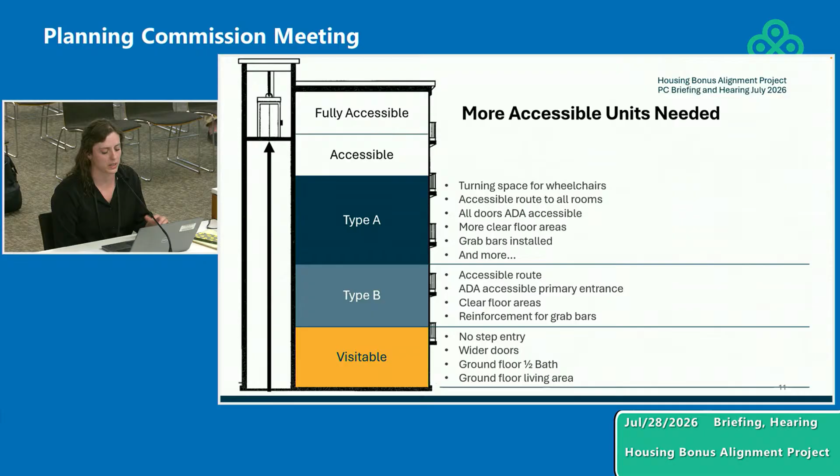We were fortunate enough to tour the new M. Carter Commons before they opened. It's a senior housing development funded in part by the city, a partnership between Urban League and Northwest Housing Alternatives. It's an example of what even higher levels of accessibility might look like inside a home, including low storage spaces, removable cupboards, roll-under sinks, front controls on appliances, and easy access to grab bars and seats in bathrooms.

More accessible units like these mean more people will have better and adequate access to the essential functions in their home. And if I might say, it's not a bad looking unit—it's a Type A unit, so a slightly more accessible level.

All right, so I'll jump into how this project will likely help meet those needs. The scope of the project is pretty limited to the multi-dwelling residential and commercial mixed-use zones, where most of our existing zoning bonuses are already applicable, and where we're already able to build the most densely. So you might see these along Woodstock, 122nd, Division, Interstate—our centers and corridors.

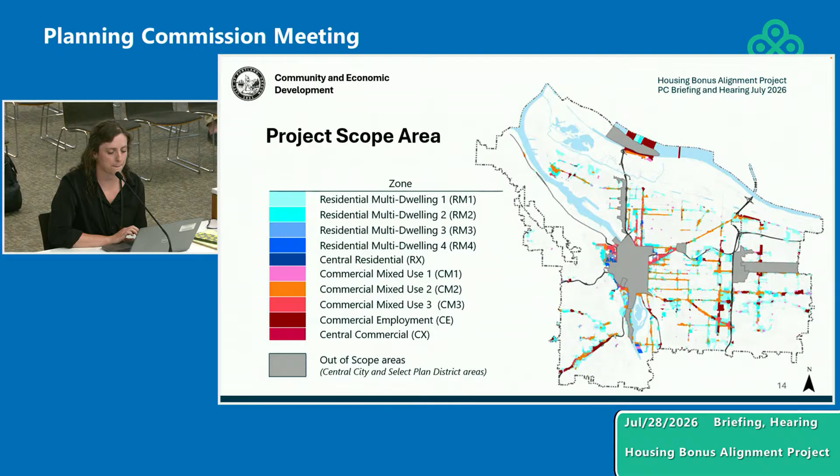I made sure I printed this out for you all too. I know it's really hard to see, but the multi-dwelling and commercial zones—so RM and CM zones—I wanted you to see the scale of buildings that are possible in these zones around our centers and corridors and near our single-dwelling residential areas. The types of new development in these zones can really range from duplexes to small apartment buildings to a more diverse range of higher density structures, and buildings in these zones might range from 2 to 7 stories or higher.

And then before we get too far in, what is a bonus? Hopefully the screen will change for you all soon. There we go. Okay, sorry about that.

So the scope of this project is exclusively zoning incentives—the additional development that's allowed in exchange for certain public benefits, not direct financial incentives. Our primary levers in the zoning code are additional floor area ratio, so building square footage relative to site size, additional height, so how tall your building can be, and building coverage, how much of the land can be covered by a development.

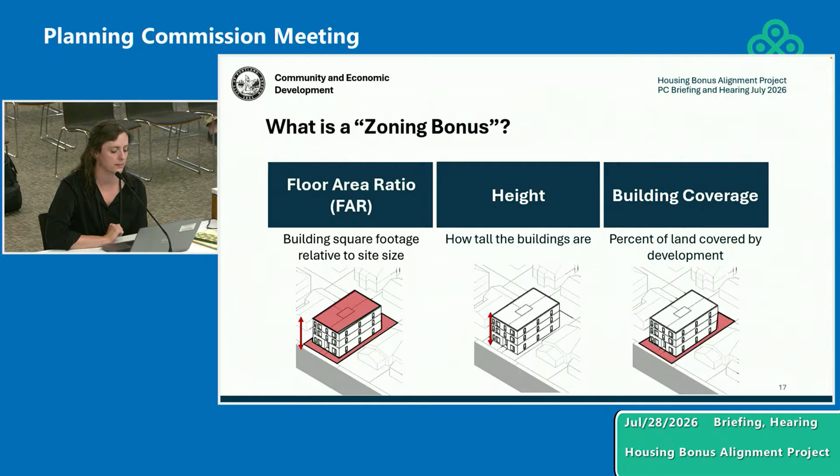In our RM and CM zones, we do have 6 bonuses already. The first 2 are inclusionary housing and affordable commercial. Inclusionary housing is not included in this project, as it's already undergone its own recalibration study and will soon also undergo another recalibration. Affordable commercial is not being revised as part of this project, as it deals exclusively with commercial space. So we're looking at these 4 other voluntary bonuses so that they can be a bit more usable with the existing bonuses.

All right, so these 4 main bonuses are: first, deeper housing affordability, which is incentivizing units for low-income households when a development has at least 50% of those units set aside. Of these bonuses, it's currently the most used, but it's mostly used by affordable housing developers, typically when they're already doing 100% affordable projects.

The visitability bonus is for units meeting that lowest level of accessibility I mentioned, still allowing folks with mobility disabilities to visit the first floor of a home. However, the bonus as it's currently written is not available to most multi-dwelling or apartment developments.

The 3-bedroom bonus similarly has a 50% requirement that units must have 3 or more bedrooms, and it must also apply a 10-year affordability covenant at 100% area median income.

And then lastly, we have the planned development bonus, which functions more as a small master plan site. It has things like added design requirements, energy efficiency requirements, and also affordability built into it.

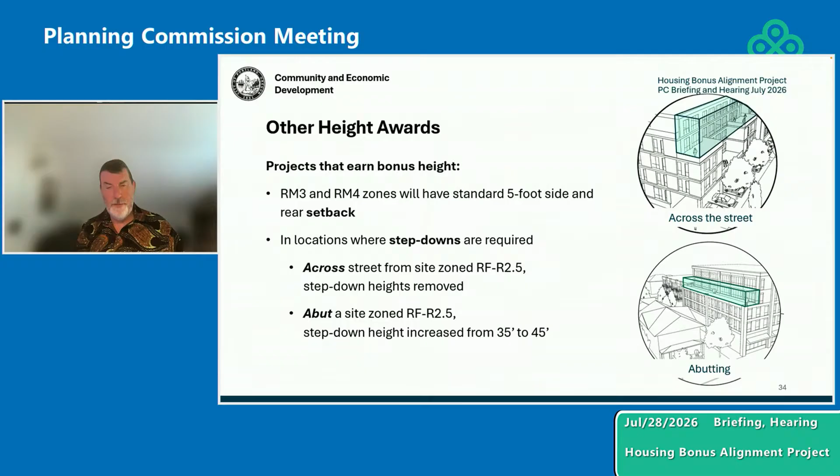The fourth and final proposal includes several fine-tuning revisions to make the bonuses function better. To improve housing affordability outcomes on sites proposing more than 20 units, where inclusionary housing isn't triggered because no single building has more than 20 units, the bonuses would require that voluntary inclusionary housing be used before the other bonuses may be used.

We clarified a number of code provisions as well. In the Main Street Overlay Zone, we clarified that the CM1 zone is eligible to use the base zone bonuses. We added dimensional standards for indoor common areas, since these spaces can be substituted for outdoor area but currently lack dimensional requirements. We included a basic definition of bedroom to clarify what will meet the requirement to earn the multiple bedroom bonus.

To improve the usability of the code, we consolidated the bonuses into a single section, elevated the specific increments of FAR, height, and coverage earned per bonus, and made the code more consistent between the multi-dwelling and mixed-use zones. And lastly, because many of the same bonus types and incentives that exist in the senior and disabled high-density housing chapter will now be available in the base zones, this chapter is being deleted.

And that's it for the proposals. I'll turn it back to you, Ariel.

Okay, thank you, Morgan. I'll share a bit about expected outcomes from these proposals. As we were working on these proposals, we worked with other staff and a consultant to model how these proposals might impact development choice and feasibility.

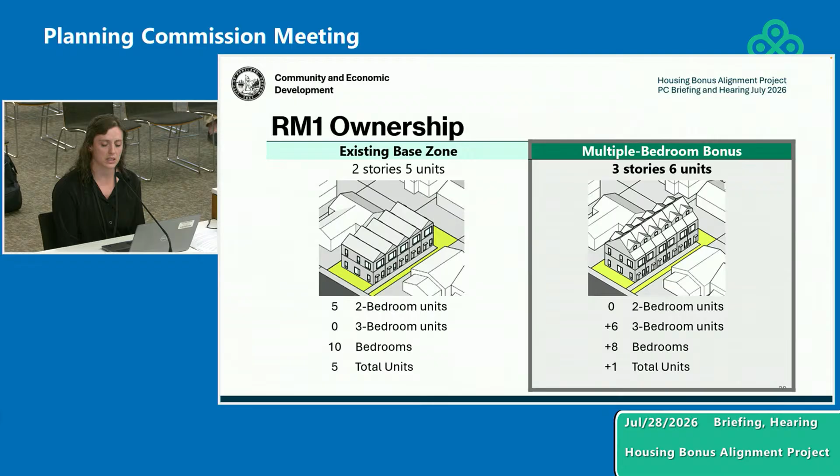And on small sites in these lower density zones, we expect it's likely realistic for just one bonus to get fully maximized. This is just some real world examples - these are not in RM1, but of 2- and 3-story townhomes similar to what was modeled.

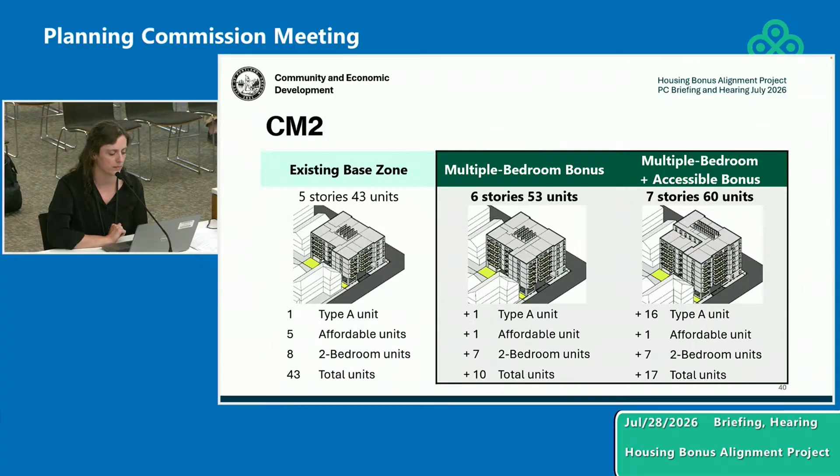Again, just some current day examples of some 5 to 7 story buildings in our commercial areas. In general, as we were able to model, we really do hope that these changes are going to lead to greater utilization of the bonuses and help improve feasibility in the long run. And as a result, we'll be seeing more of our needed unit types, hopefully including more affordable, larger, and accessible units.

Before I invite Abby up, I do want to talk a little bit about how we got from our code concept to the proposals before you today. Just really high level, some of the engagement that we've done so far. Staff utilized feedback received during the engagement, both to develop the proposals as well as to revise between the discussion and proposed draft.

In addition to the engagement that we did for the housing production strategy, early in the project, staff conducted interviews with about 25 different development professionals. This included developers, architects, but also advocates, which led to that focus of expanding bonuses from just the floor area ratio to include height and coverage bonuses as well. We also held online info sessions, published our map app for comments, met with community groups, held cross-bureau meetings with our bureau partners that led to further refinement.

And then additionally, we also worked with Abby to conduct interviews with individuals with disabilities. Those interviews specifically, I did want to point out, helped us develop the ground floor accessible unit floor area exemption that Morgan mentioned, because we heard a lot about wanting more ground floor accessible units available.

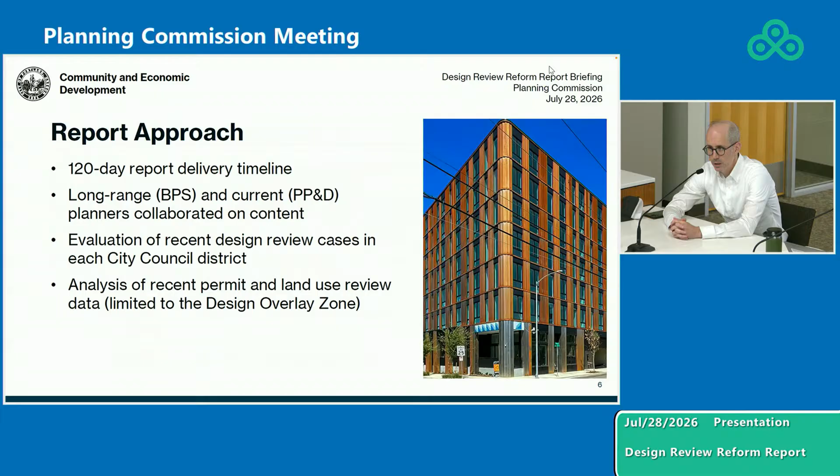And then, so we did some listening sessions. We talked to the Design Commission. We talked to the Historic Landmarks Commission. And then we also did some briefing with the Development Review Advisory Committee, or DRAC as it's sometimes known. And then we also did some select interviews with people in the development industry and their representatives - both people who sort of make the buildings happen in terms of financing and constructing them, and then also the architects. We didn't do broader inclusive engagement. This wasn't a legislative land use process, but future code changes that may come out of this would require more input, and so those would go through a more rigorous engagement process.

And then the report was transmitted to City Council, and it's available on our webpage. Thanks, Ryan.

Many of you, or several of you, had the patience to join us for our comprehensive plan trainings a couple of years ago. One of those trainings walked through how our city design regulations work, which are primarily in chapters 3 and 4 of the comp plan. I won't go to that level of detail tonight, but we did think it'd be beneficial for the full commission to get a little grounding in how our design regulations operate, where they are in the code, and the different facets that we looked at in the report.

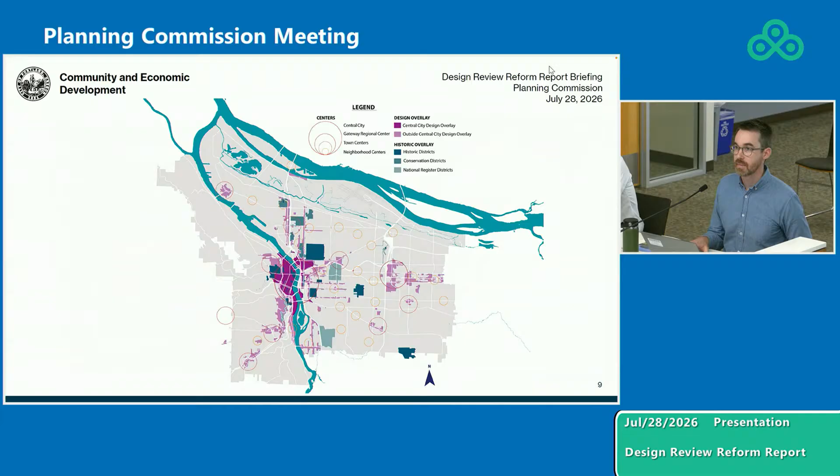Those two areas are overlay zones in the 400s chapter of the zoning code. They apply design-related regulations for two different purposes: one, in the design overlay zone, to accommodate generally larger scale new development in areas of the city that allow it the most; and two, in the historic resource overlay zone, to ensure historic physical features from historic resources are retained and that new development relates to existing historic development in places like historic districts. I'll talk about these two zones, starting with the design overlay zone, then the historic overlay zone, and I can come back to this map anytime.

For those not terribly familiar, the design overlay zone applies to about 7.5% of the city land area and was first implemented downtown in 1959. Its first application downtown was largely a product of the AIA and other interested historic preservation and architecture advocates looking at a downtown that was changing in a direction that looked more auto-oriented and less pedestrian. So the first application of the overlay zone in a small section of downtown was really intended to reverse or correct that trend of blank walls, auto-orientation, and loss of the public realm.

Over the years following 1959, the design overlay zone was expanded to larger areas of downtown, and eventually to the entire downtown area. Now it covers many of our centers and corridors that allow development of approximately 5 or more stories — places like the CM3 zone, the RM3 and RM4 zones, and the more urban central city zones, the CX and RX type zones.

Generally speaking, the design overlay zone does not apply to single dwelling zones or low density multi-dwelling zones. The philosophy had always been not to apply it to the low density zones, but where it was applied, that was largely repealed 5 years ago in the design overlay zone amendments project.

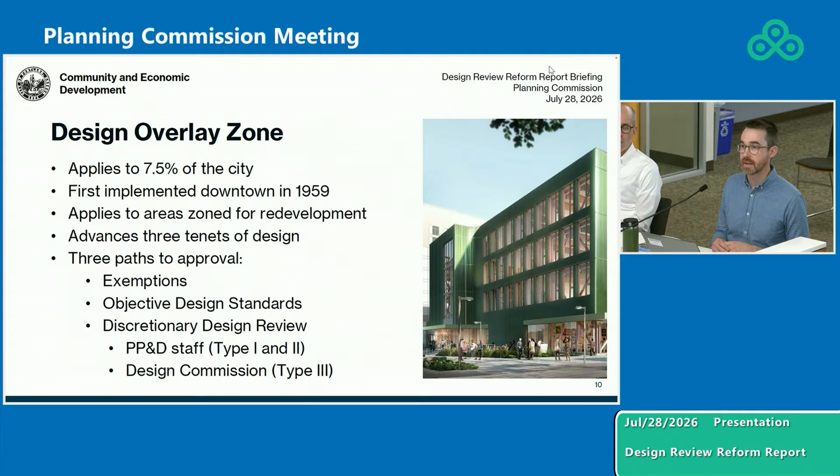I can come back to this one, but to keep us going, we'll talk about the historic overlay zone and how it is designed in our code and regulations to parallel some of the approaches we use in the design overlay zone.

The historic resource overlay zone applies to a smaller area of the city, about 4%. City Council first adopted the regulations for this zone in 1968, and at the same time created the Historic Landmarks Commission. It applies to historic conservation and National Register landmarks and districts.

The Paul Bunyan statue, the Pittock Mansion, the Northwest 13th Avenue Historic District, Ladd's Addition Historic District — these are places that are designated historic resources. They've gone through a formal process to be evaluated for historic significance and formally adopted as designated resources.

Unlike the design overlay zone, which is intended to apply in places where significant growth is allowed and expected, the historic resource overlay zone applies in places where we are trying to implement federal, state, and local historic preservation policies. Just like the design overlay zone, there are three paths to approval for new development and alterations in this zone.

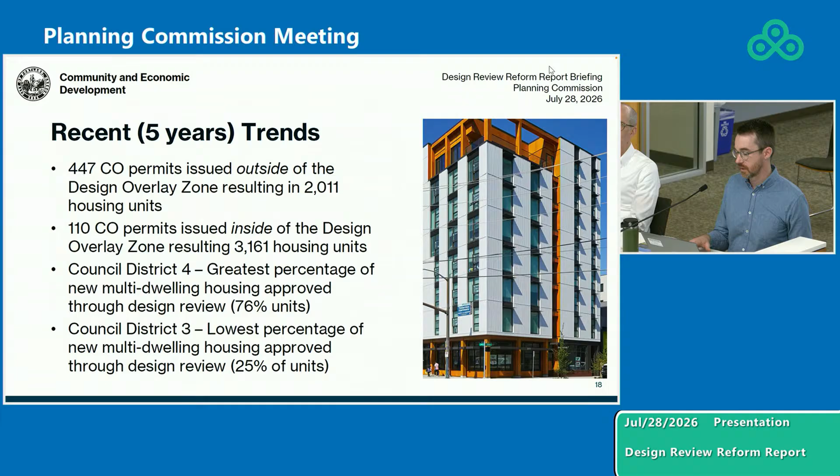A couple of interesting notes, and you can dig into the report if you're curious to go deeper. Council District 4, which includes the downtown core, had the greatest percentage of multi-dwelling housing units approved through design review—76% of new commercial multi-dwelling housing units went through design review and were approved. Council District 3, on the other side of the river, saw the lowest percentage, about a quarter of new multi-dwelling housing approved through design review there. So there are some geographic differences citywide, both in where the zone applies and where activity has happened in recent years.

And then a couple last things from the recent past: timelines for design review have steadily decreased. Last year and in 2024, the average length of time for a project going through design review was 100 or fewer days. So generally speaking, the timeline for getting that land use review completed has decreased in recent years.

About half of new buildings proposed in the design overlay zone have gone through the objective standards path—again, only available today outside of the central city—and that's the prescriptive path. And then the last thing I'll say: in recent years both the Design and Landmarks Commission have not had the workload they've had in past eras, in part because we have fewer projects, as I just showed, and also because we have some temporary allowances for projects that previously would have gone to the commissions to instead be reviewed at the staff level.

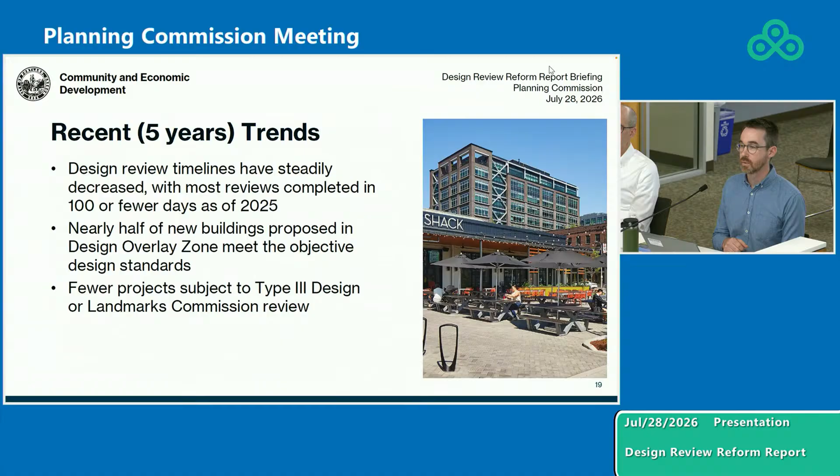So there's more data in the report that we thought would be interesting both to this group but also to City Council, and we can talk more about that in the Q&A if it's wanted. But one of the other aspects we wanted to respond to with the council request was giving them a sense of the different economic consequences that come with design review specifically.

Council was very interested in this collaboration with staff to get a better understanding of how we might think about the benefits and burdens of design review, and we tried to provide that to them in a way that sets a table for discussion.

I won't drill down into each of these tonight. We did try in the report to explain how these things work, but generally, the cost of design review comes down to hard costs, which are the actual cost of building something and seeing it to completion—things like the exterior materials, the articulation of a building, the presence of a courtyard, or how a building steps back, those tangible physical costs of development.

There are soft costs, which are architecture, engineering, and permitting costs—things like the cost of the design review application, the cost of the architect or designer to attend the design review meeting with the design commission, and the cost of additional time to go through the process.

And then something we heard about a lot from the development industry and experts was the predictability expense of design review—people concerned that a project might not be approved, or that approval may be appealed, delaying the project, or that there may be a misreading of the approval criteria causing a drastic building redesign. We did hear from development industry experts that in recent years they've not experienced the uncertainty that maybe existed in the past, after those DOZA reforms went into effect, but nonetheless it's a cost that is taken seriously.

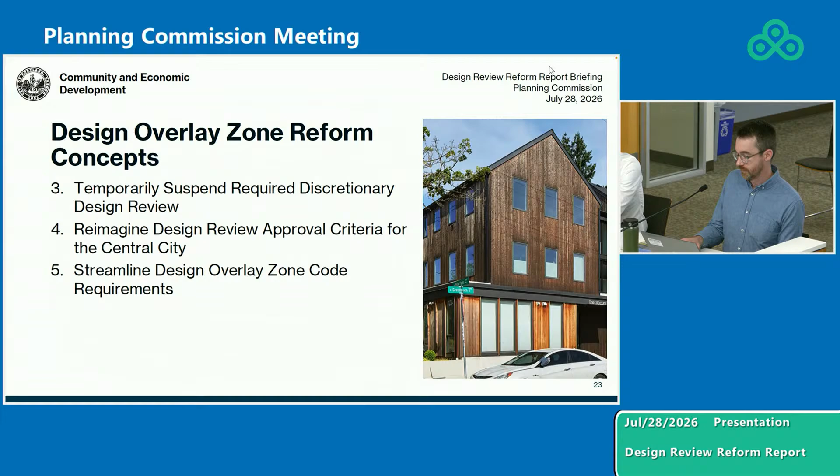Thanks, Brandon. So as part of the transmittal to the City Council, the BPS and PP&D director gave a cover memo that proposed a path forward: a 2-year temporary suspension of the mandatory design review, which is concept 3 that Brandon mentioned. And for BPS to develop a work plan for a 2-year legislative project to advance our highest priority concepts. So we are doing that, and we're on schedule to bring before the Planning Commission a proposal to temporarily suspend mandatory design review.

We're also putting together a work plan that will have more and less of all the concepts. The concepts were bucketed for the report in a certain way, and now we're looking at them from an execution and geography standpoint. We think there's a central city focused one that will look at design fundamentals and may include some historic work. Then outside the central city, some cleanup of the D overlay.

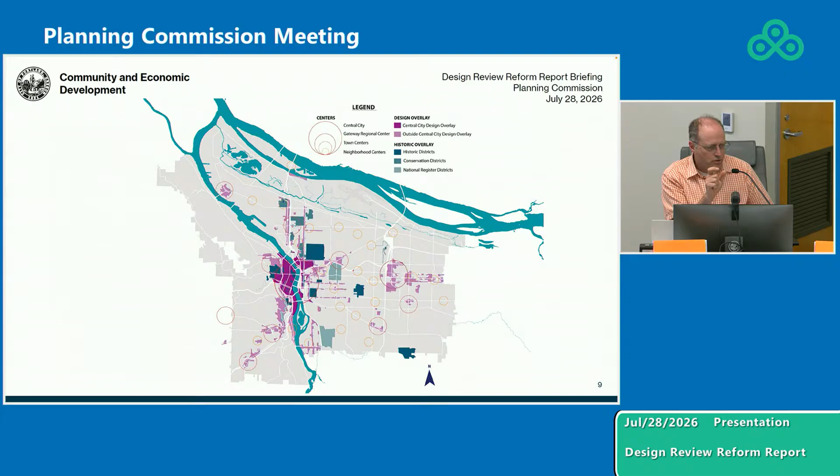Last question then is, why do we have a map for design overlay? Why didn't we just say the zone? If you're in that zone, one of the things you have to do is, like on the table, design... is there a reason to have the map? I guess there's some peculiar small cases, but is there a reason to have a map?

It's because it's an overlay zone, and so we basically map it as an overlay like we do with the historic overlay zone. If you look at a property on Portland Maps or something, you'll see a little D for the D overlay. Visually, I think the map is helpful for the exercise tonight, but in general, in the code, you don't see the map like that. It's just the letter for the overlay applied to properties that meet those qualifying criteria.

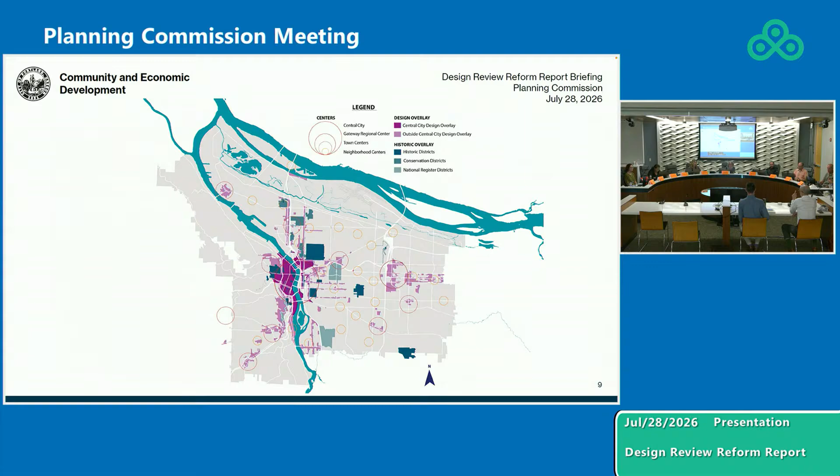Commissioner, I was just going to say that it's largely for visualization, so people have a sense of where it exists. I'll add two things: the map shown here does show our centers, and many of you can sort of see where the centers are based on where the design overlay zone is, and likewise our inner corridors also have the design overlay zone, which is where most of the larger development can occur.

Also, there's a process in the code that when we apply the design overlay zone, we also... if you'll recall, in Montgomery Park we applied the design overlay zone, and then we had that joint hearing with the Design Commission. That was one of the reasons why they were involved in that process, because we were applying the design overlay zone and they were brought in. So will they be part of the Inner East Side housing project if there's going to be application of RM3 in other places?

We're mapping the D overlay, that's what our code says. I think that's a future consideration. And I think, Commissioner, it's a policy choice.

Unlike historic resources, which are addressed by a state land use goal, Goal 5, design overlay is not addressed by a state land use goal. We try to achieve things that relate to the land use goals through our approval criteria and standards, but we have significant local policy flexibility with where and to what degree we apply the design overlay zone, with the exception that state law does say outside of the downtown, new development that includes housing is guaranteed a prescriptive path, a clear and objective path.

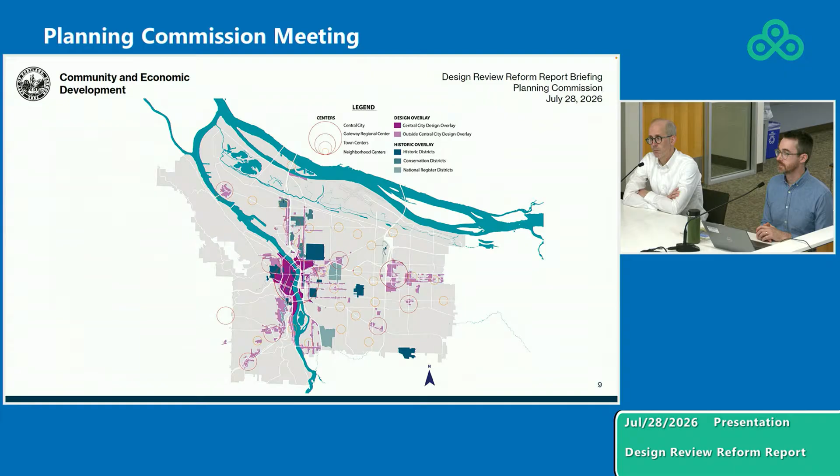Yeah, Commissioner Knowles. So this prompts a question.

Does this mean that if you propose suspension of design review, it will not apply to the RM3 zone and other zones? At the same time that we're potentially bulking things up, you're going to get rid of design review? It would still apply. The design overlay still has design standards that would have to be met. Design review is an option and a path for waiving certain provisions and standards in the code. Commissioner Knowles, the design review overlay zone standards would still apply.

We kind of had this discussion when we were talking about the Central City Code Amendment project last time. So when you look at the D overlay zone in the code, there's a set of standards that are applied through a building permit review process. So those would still apply.

Now, more generally, I want to say the report that you and your colleagues have prepared is really exceptional in describing the relationship between all of our regulatory tools, the comp plan, state law, regional policy, design review, historic conservation requirements. It's a great primer, and I commend it to everybody on the commission to take a look at that. It's long, but it's just really, really good. So I want to congratulate you on that.

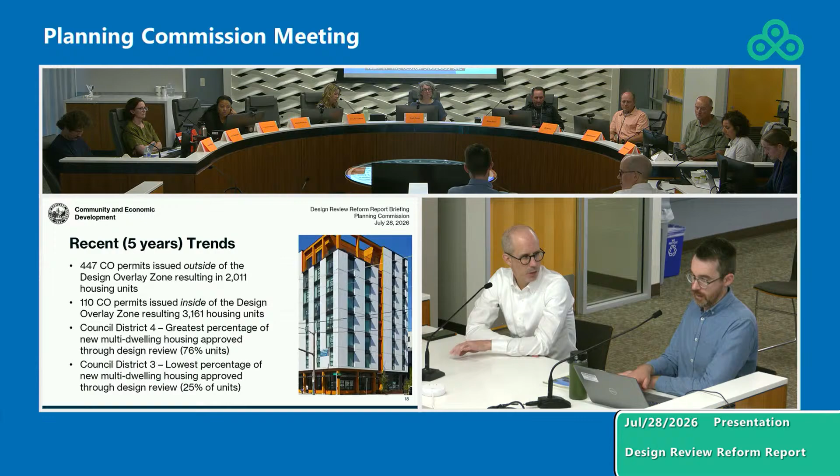I want to go back to our discussion of standards. Our colleagues at PP&D would want us to state that many of the design standards are adjustable under a recent state Senate Bill, 1537. So that's one thing to keep in mind when we speak of these standards - they're also subject to automatic adjustments, many of them. We'll try to give more information as to what that looks like when we come back in September.

Trying to think if I had any further things to add. Other information on what the council was seeking, what problem they were seeking to solve?

Yeah, I'm just scanning the resolution quickly to remind us - it's been a minute since I looked at it, but essentially I think it's what the staff is saying, which is it's consistent with a lot of things we've been doing and what City Council has been concerned with: how do we remove barriers to development? This resolution speaks not just to residential development, but also to commercial development. A lot of what we've done recently has been focused on housing and removing barriers to housing. I think the concern is that we're seeing so little investment and development, and wanting to understand, is design review a barrier?

There was also in the report, and I think Brandon touched on it a little, a discussion about cost - what kind of cost does design review represent. We didn't dig into that very deeply, but we did to the extent that we could. So it's really about continuing to identify ways to remove barriers to development, and believing that in the short term we need to do many different things and take many different approaches to stimulate or kickstart or make projects feasible under these market conditions.